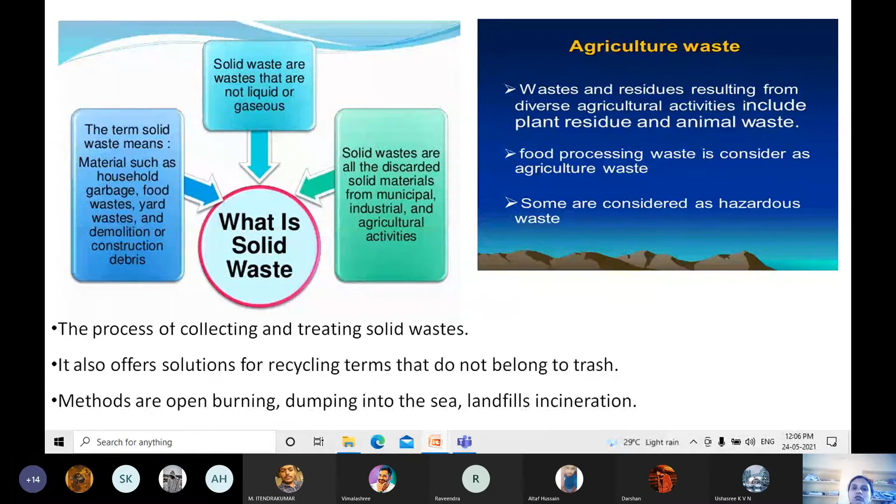Waste is wealth. Nowadays, even in our college, there is an eco club. We are trying to get students not to use plastics more, and we convey to them - as many people do - not to waste food, not to waste water, and not to use plastic papers or plastic bottles more.

Waste is a wealth - from waste we can convert to wealth. What is the objective of solid waste management? The objective is to control, collect, process, and dispose of solid waste in an economical way, consistent with public health protection.

In Torangallu, they collect all the waste and use it for tar roads - they use plastics and all for the tar road. In Jindal, the tar road plant collects all the plastics. In Torangal village, and even in many countries, states, and villages, they are now collecting wastage to be reused or converted into other usable forms.

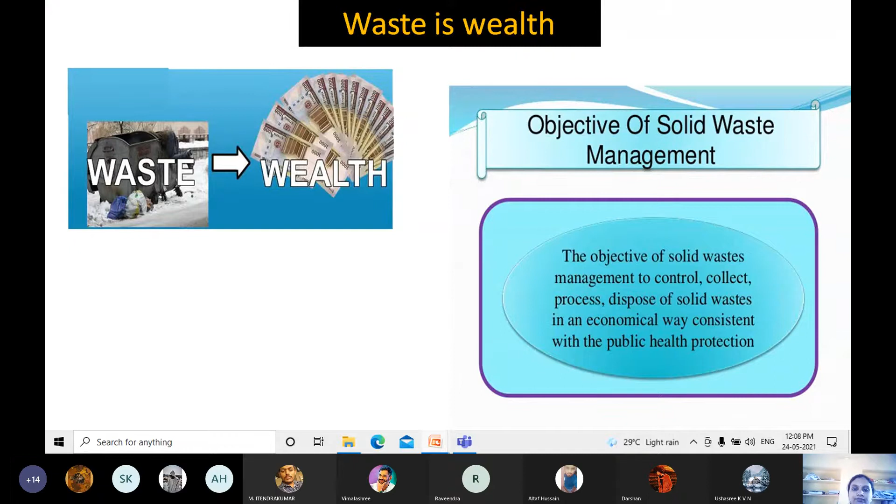We should not throw it out - waste is not waste, it is wealth. Converting waste materials into usable form - what can we convert nowadays at home? If something is waste, your mother will think how to reuse it, or how we can create something new from it. In India, wherever you go, converting waste materials into usable form is a good idea.

The next output is biogas, digestate, and from that the output is heat, electricity, and fuel gas grid. From waste we can generate heat energy, bioenergy, recycling, and fuel and energy generation from agricultural and municipal waste.

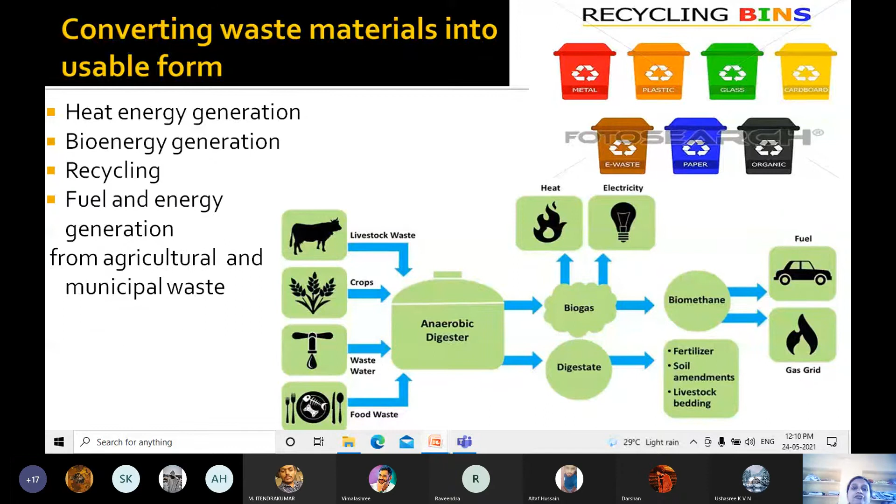You can observe the diagram of recycling bins. What are the recycling bins? Metal, plastic, glass, cardboard, e-waste, paper, organic - there are many different types of waste that can be reused.

Sources and types of waste: residential waste, municipal services waste, industrial and commercial waste, building and construction demolition, and agricultural. The types and sources of solid waste: first is residential, from your home, generated from living households, domestic. It generally contains non-hazardous solid waste, that is kitchen waste and also ash.

Commercial waste is generated from business establishments such as food establishments, shops, etc., that generate generally non-hazardous waste such as paper, cardboard, wood, metals, and also glass. These are the types and sources of solid waste.

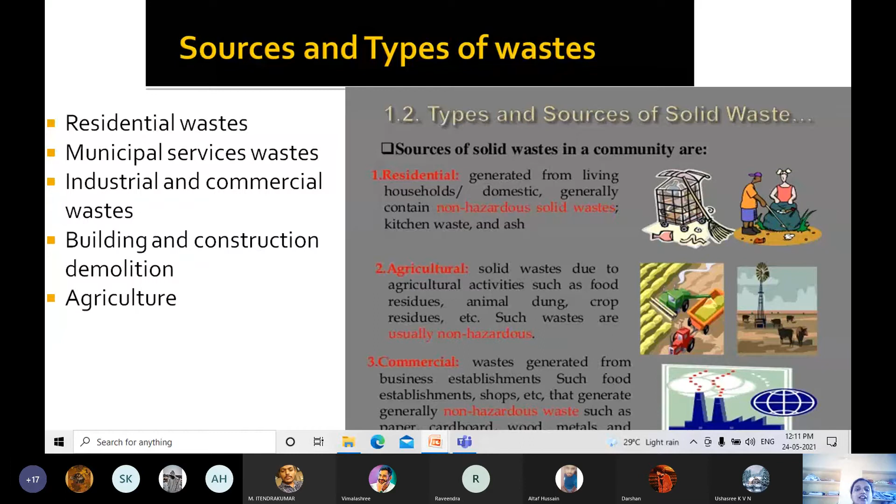Next is the methods of waste reduction. How we can reduce the waste: incineration process, pyrolysis process, anaerobic digestion, recycling, and bioenergy conversion. We already know about biomass; we will use the waste and convert it to electricity, that is biomass energy. Landfill, incineration, waste compaction, biogas generation, composting, and vermicomposting. These are the waste recycling or waste reduction processes.

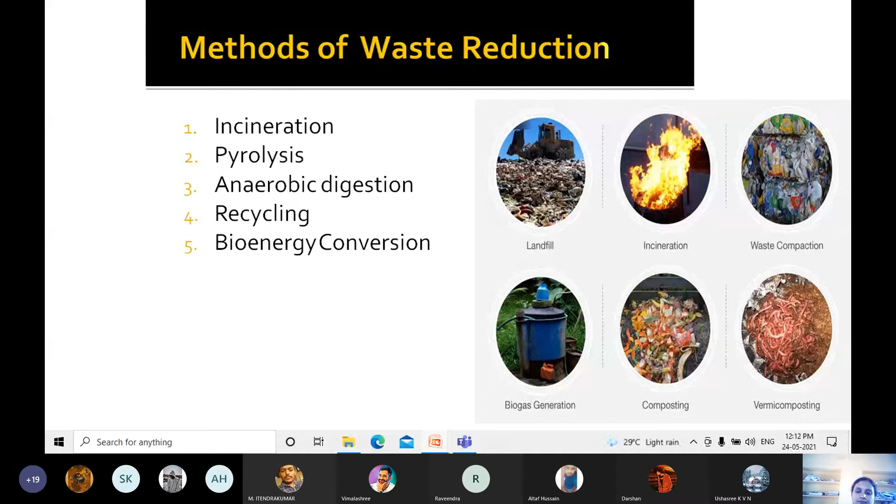Waste material is bunkered in a secluded space; waste material will be collected in some space. Next is a feed table. We will put it onto the feed table, and it will go to the next process, the incinerator, where it will be boiled under a steam boiler at 1000 degrees Celsius. The output we get from the incinerator is ash, flue gases, and also heat.

Burning of waste in an incinerator will only reduce its volume. For example, if it is this much waste, then it will reduce to this much. Burning of waste in an incinerator will reduce its volume, but does not dispose of the toxic substances in the waste, and it creates the largest source of dioxins, which will affect the environment.

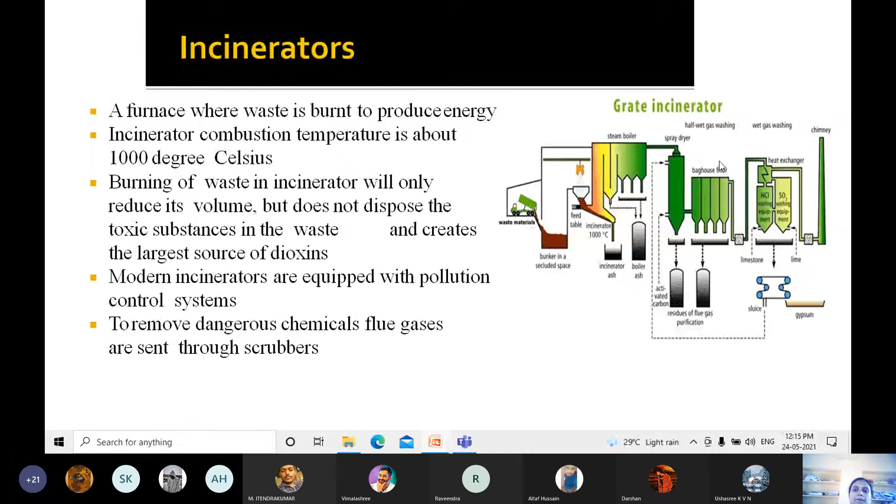Updated equipment has a pollution control system. To remove dangerous chemicals like flue gases, a scrubber is used. Scrubbers are used to remove dangerous chemicals like flue gases. This is a spray dryer bag house filter. This is nothing but the scrubber process, to filter.

Next is the process of incineration. First is the auditing of waste. Auditing of waste means solid waste. In solid waste there are also different types: agricultural waste, industrial waste, commercial waste, waste from homes, etc. Like that, in auditing of waste, we are dividing the waste.

Here we understand the quality, and also the quantity, how much we should put into the combustion or our boiler. Quantity, quality, and composition of waste is an important step in selecting the appropriate disposal option. They will dispose of it outside the village or outside the cities. Quality, quantity, and composition of waste are important in this auditing of waste.

Next is proper incinerator selection. For example, if we select any equipment, we will read all the description, what the properties of that equipment are. Like this, if they are selecting the incinerator, proper incinerator selection is also required. What properties should it have? It should be suitable, that is, suitability of existing incinerators, and capability.

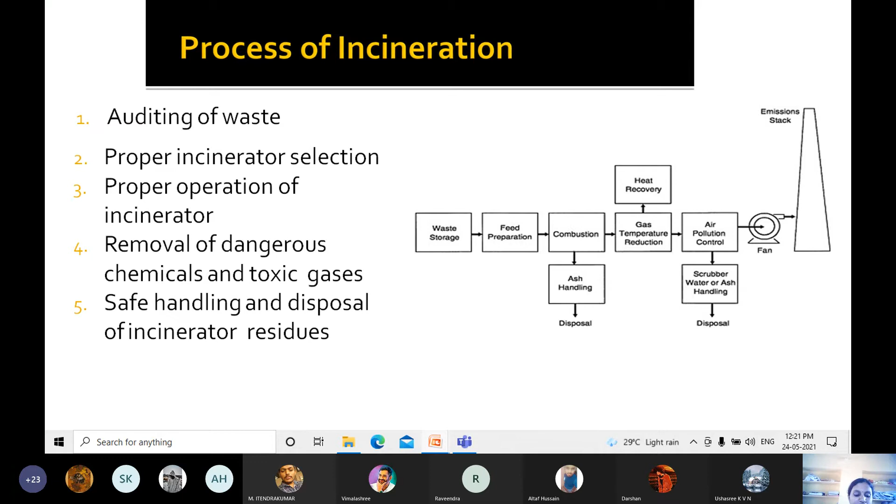Next is the advantages and disadvantages of incineration. Advantages: it reduces the waste stream, saves landfill space, incinerated waste is totally free of environmental risk, it can be operated under any weather conditions, and it can recover natural resources if it uses refuse derived fuels. It can be linked to generation of electricity, with the waste stream increasing in paper and cardboard content.

Incineration is cheaper in the long term and has a long lifespan. It can be operated under any weather conditions, and it is totally free of environmental risk.

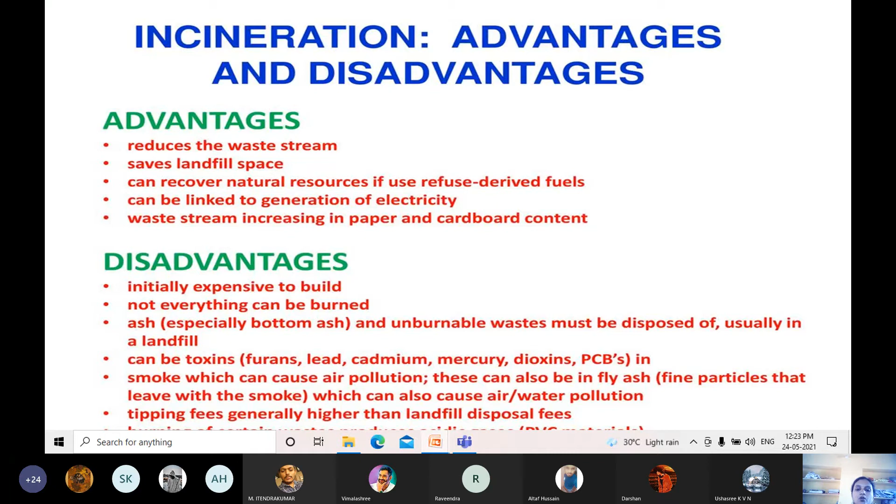And what are the disadvantages? Initially expensive to build; the starting installation is expensive. Not everything can be burned. Ash and unburnable waste must be disposed of, usually in a landfill, and there can be toxins in smoke which can cause air or water pollution. The tipping fee is generally higher than landfill disposal fee, and burning of certain waste produces acid gases.

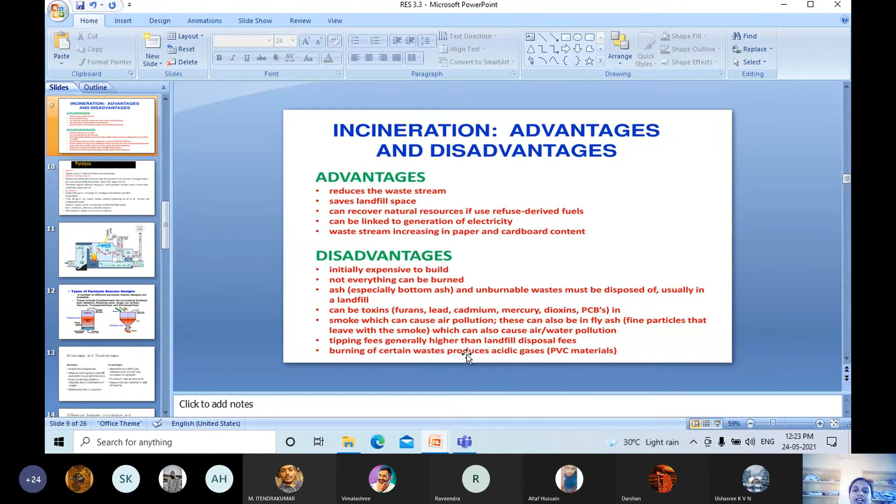Next is pyrolysis. This is another process, where organic waste is burnt at relatively low temperature. It is the chemical decomposition of waste materials by heat in the absence of oxygen, under pressure, at operating temperatures above 430 degrees Celsius. In this technology, organic waste is burnt at low temperature to produce charcoal, oil, and combustible gases. The output we get is charcoal, oil, and gases.

Here they say that the oil can be used for chemical feedstock or as a fuel, and feedstock includes mixed waste like plastic, tires and sewage sludge. Organic materials are transformed into gases, small quantities of liquid, and a solid residue containing carbon and ash.

Once again, I repeat, here chemical mining of waste means chemical decomposition of waste materials by heat in the absence of oxygen, under pressure, and at an operating temperature above 430 degrees Celsius. The pyrolysis process will transform organic materials into gases, small quantities of liquid, and a solid residue containing carbon and ash.

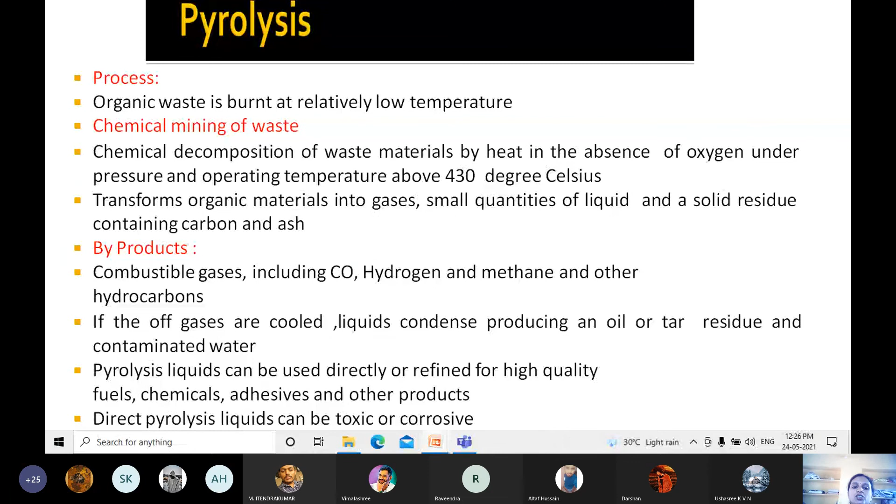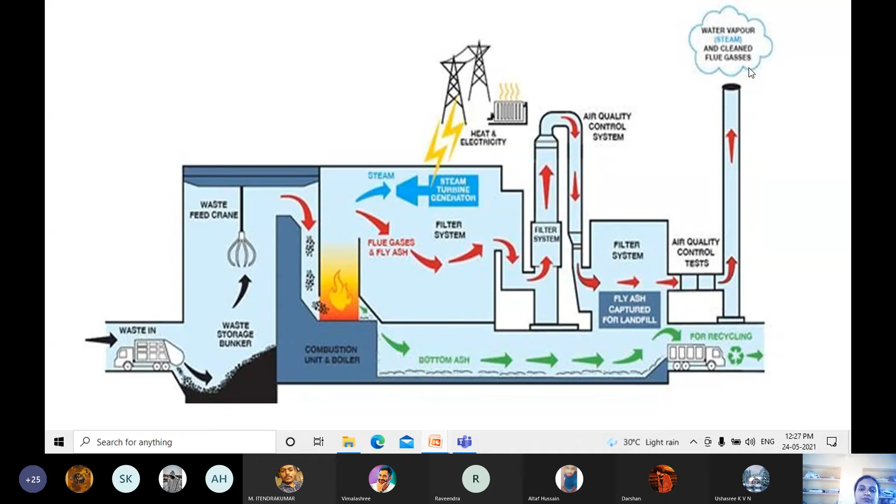Types of pyrolysis reactor designs. There are different types of pyrolysis reactor designs, including fluidized bed, recirculating fluidized bed, ablative, rotating cone, auger or screw, vacuum, transported bed, and entrained flow. Two types are mentioned: fluidized bed and rotating cone. They have not given the diagram, so I have put it in the PPT. They mention several types of pyrolysis units are available, including the rotary kiln, rotary hearth furnace and fluidized bed furnace.

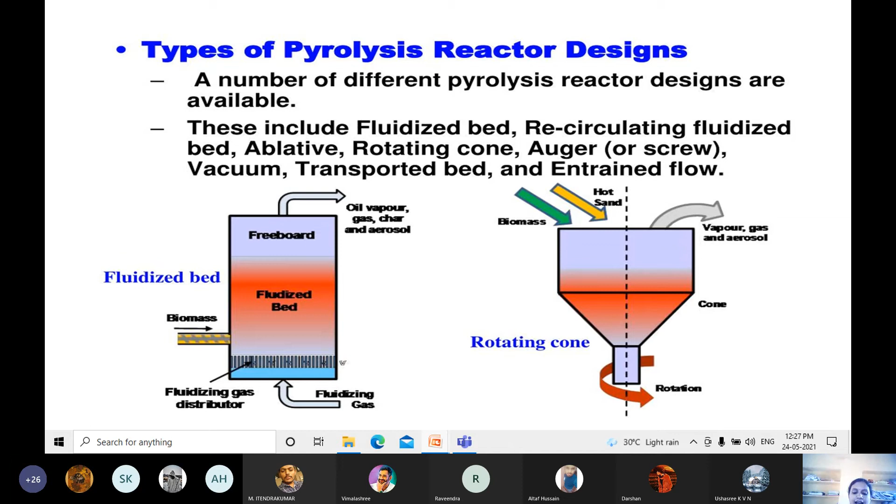What are the advantages and disadvantages of pyrolysis? Advantages: it is simple and inexpensive. It reduces waste going to landfill and greenhouse gas emissions, and environmental problems are reduced due to limited use of oxygen. Remember, in the absence of oxygen. Next, it is flexible and easy to operate.

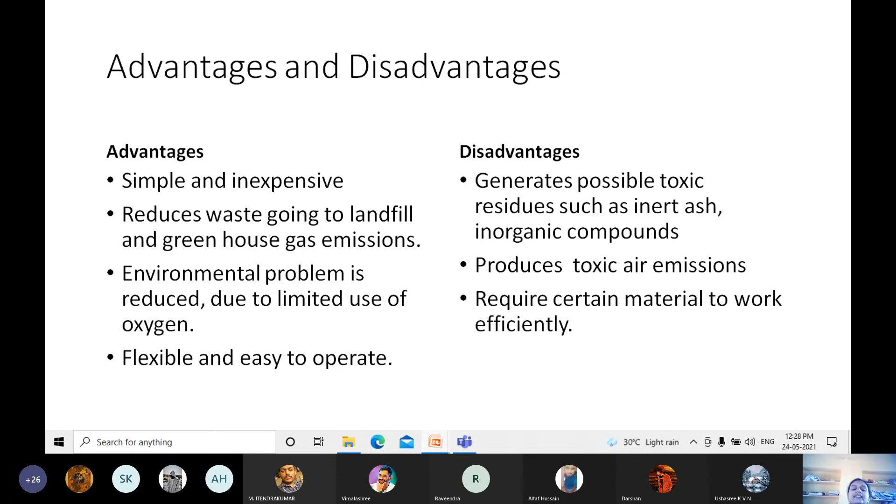What are the disadvantages here? It generates possible toxic residues such as inert ash and inorganic compounds, it produces toxic air emissions, and it requires certain materials to work efficiently.

Next is the difference between incineration and pyrolysis. Incineration requires oxygen in the form of air. Pyrolysis is thermal degradation in the absence of oxygen. Incineration uses a higher temperature, about 850 degrees or above; pyrolysis, 430 degrees. Incineration produces energy as heat, which can be used to create steam for generating electric power. The end products of pyrolysis are fuel oil and fuel gases, which are convenient for storage and transportation as a heat source.

And also, pyrolysis is a controlled chemical process in order to produce valuable secondary raw materials like solid, liquid or gas. Incineration will reduce the quantity of waste to be landfilled. Pyrolysis systems for treatment of MSW and other waste demonstrate excellent practical performance in controlling the emission of harmful substances like dioxins.

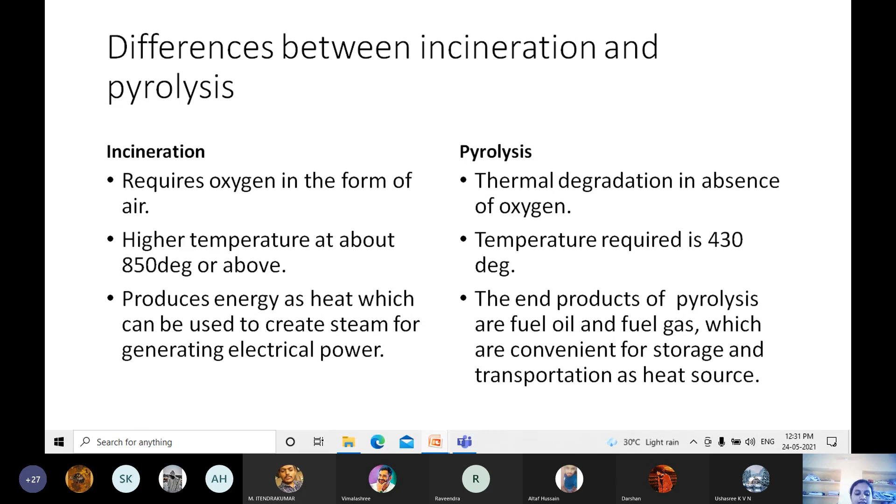But in incineration, like coal combustion, it will produce carbon dioxide as well as nitrogen oxides, sulfur dioxide and a range of other gases, inorganic air emissions. This is the difference between incineration and pyrolysis. In the next class we shall read about anaerobic digestion. Okay.